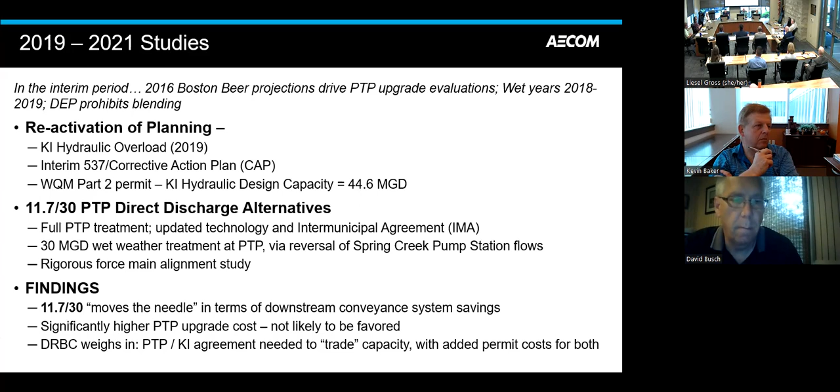So looking more at the interim period, 2019 to 2021, which is the more recent efforts involved, what had transpired was around 2016, Boston Beer started making projections of their future needs and what was being seen at the pretreatment plant. And that was going to drive a lot of upgrade. They have a very high strength wastewater, as I think everyone's familiar with, and it really dictated the capacity needs of the plant. There was also, overriding that period, wet years, the 2018, 2019 period, that was really driving a lot of wet weather challenges. And at the time, DEP also came out with their statement prohibiting any kind of blending at Klein's Island in terms of bypassing flow around a biological process. So those were all important elements during that period.

And so reactivation of planning was done to take another look at things, beyond that 4.9, at what other options and opportunities there were looking forward. So one of the items, just to reference, there was a hydraulic overload at the plant in 2019 where we exceeded the max flow for 3 consecutive months. And as a corrective measure for that, there was an interim Act 537 done and a corrective action plan that was able to restore the ability to move forward with planning modules in the meantime. And as part of that, the water quality management Part 2 permit, which is what the WQM there is, increased the hydraulic capacity of Klein's Island from 40 to 44.6 MGD, which was important. The DEP regulates plant capacity by hydraulics and load, so it's important to look at them separately.

So at the time, a revisit to direct discharge was looked at, and one thought was increasing the flow of that direct discharge. So then we looked at 11.7 MGD, and that included the projections that reached the pretreatment plant plus a reversal of the Spring Creek pump station to bring more flow from the Western Lehigh area to the pretreatment plant to take advantage of the asset there. And also by doing that, we're able to get a lot of that wet weather out of the conveyance system. And that's what that 30 MGD component for wet weather is.

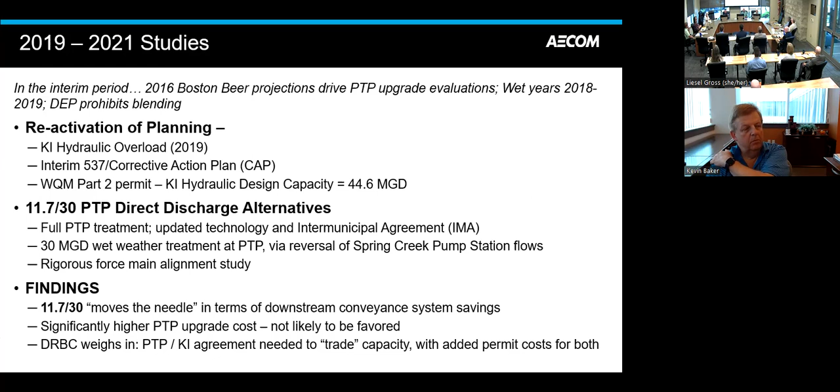There's also some weigh-in from DRBC. In the background, there's a lot of regulatory discussion and getting their input on what will be involved with that. And there would be a trade of load from Klein's Island up to the pretreatment plant. And this would add a lot of potential costs with permitting and impacts down on Klein's Island. So at the time, the 11.7 was an option, but there's more to come. That's what we'll talk about next with the fresh ideas.

But first, just our role overall as program manager. There's a lot of important facets associated with this. The work Kleinfelder is doing down at Klein's Island, Arcadis in the conveyance collection system, Jacobs with the pretreatment plant, ARRO with their role in the interim Act 537 and going forward with the formal 537.

Our involvement: a lot of coordination between all the different consultants, looking at it holistically, providing value engineering, independent review of the different evaluations, regulatory considerations and drivers, looking at it overall holistically, and then ultimately integrating all the findings and reporting and recommendations, which will be a main component of the technical portions of the Act 537.

So just an example, program management with very large utilities is often a standard, for example Blue Plains, DC Water, but it also can be used by other utilities when there's a specific program that needs to be done that's complex with a lot of moving parts. And so a program manager can come in just to support and have a different role, whether it's doing components of the program and just helping make sure that the program all comes together properly to give, at the end, the best path forward on this specific program project.

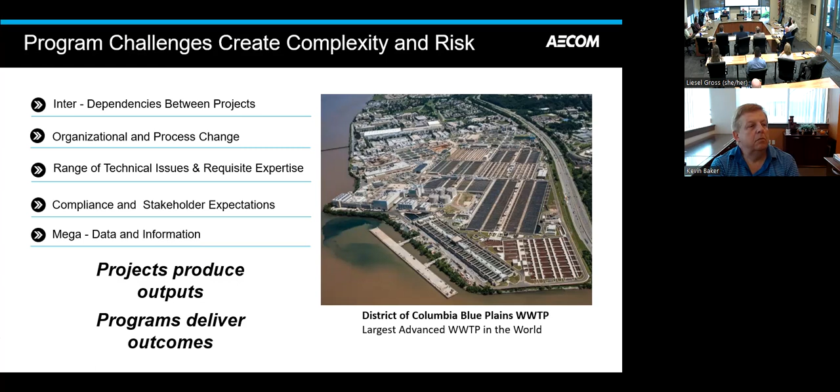So as far as our fresh thinking and what we're looking at right now, moving forward at the pretreatment plant, we recognize there's advantages in all of these assets. If you step back and look at it from a regional perspective, the pretreatment plant offers real robust organic removal, and we see that evidenced in the water reaching Klein's Island and the capacity that's available there from an organic perspective. There's ample capacity that still exists, and that's because pretreatment is doing such a good job at pre-treating the higher strength wastewater that reaches it.

Nitrification: in order to meet a new outfall in a direct discharge scenario, there will be nitrification requirements for the pretreatment plant, and that's a significant cost to add at the pretreatment plant. So it really is doubling the cost to go to the nitrification step versus just maintaining it as a pretreatment with organic and solids removal.

At Klein's Island, however, there's robust nitrification already there. It's very efficient too in a trickling filter type format from an energy perspective, and it's doing a really good job down there. So a very good asset at Klein's Island. And as mentioned, there's ample organic capacity there, as a benefit from what the pretreatment plant has been doing historically.

As far as considerations on the conveyance system upgrades, when we were looking at this in the earlier tweaks, reducing the size of the new facilities may save a marginal amount, but if we're able to eliminate major conveyance, those are very significant dollars. So we wanted to make sure that we incorporate that into the different scenarios we're looking at to make sure we can take advantage of that.

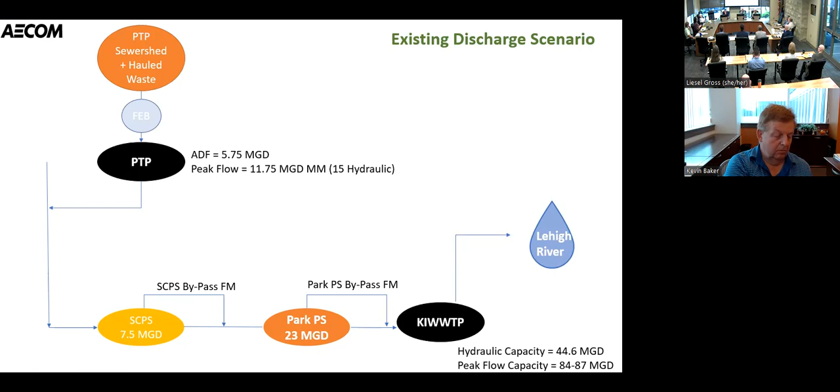I do want to make one more comment, Chris. It's important to remember that the planning horizon is through 2050. But this particular 537, the implementation schedule is through 2035. So the plan is going to have a construction schedule through 2035.

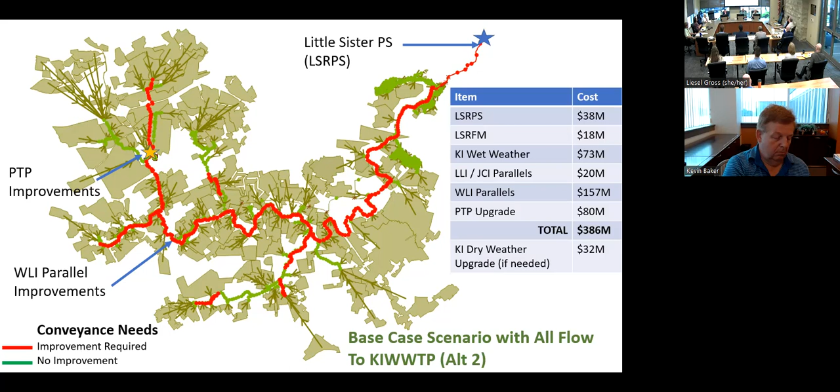I don't want to get too far into the weeds, but just curious. So big picture, the high rate treatment would be part-time. It could be off for June, July, and we get a hurricane in August, and you're operating it a week or two at a time. It would be very infrequent.

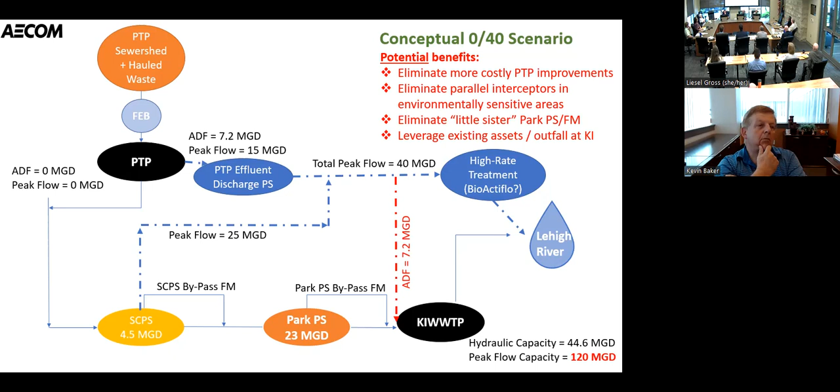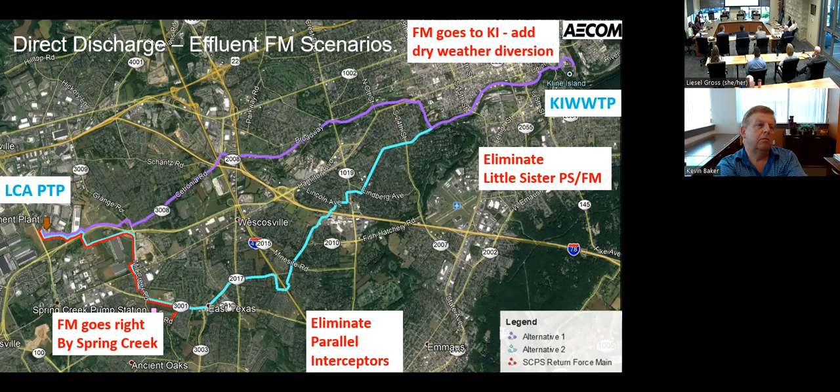So that's coming up. So as far as some of the current areas that we're looking at, working with Arcadis on the conveyance system, as mentioned, the model calibrations and simulations are about to start here. So that's going to be an excellent tool looking forward.

Common Sense I&I program, we talked about, there's these peaks that we see in the historic hydrographs, or what the flow looks like over the course of time, where we could try to eliminate some of those really high short duration peaks with effective inflow reduction into manholes and lids. And that should be just a common theme throughout the approach, just to get that really extensive peak flow out of the system, and then how to manage peak flow at Kline's Island when it arrives there.

At the pretreatment plant, as mentioned, the master plan's underway, working with that, looking at the alternatives. We've also been in technical conversations with Jacobs regarding that. Also having discussions with Boston Beer. I think just today we got some projections on their forecasted loads, which are really critical to seeing how that'll impact the pretreatment plant. But then also thinking beyond that, what else can be done at the pretreatment plant.

One concept is renewable natural gas. We have this high organic strength load coming into the plant. You could do an anaerobic process, create methane, and potentially have a recovery of that energy and costs by generating natural gas that could actually be put into the distribution system. Very good option. There's others such as equalizing flows there to just try to balance operations. So there's a lot of things on the table.

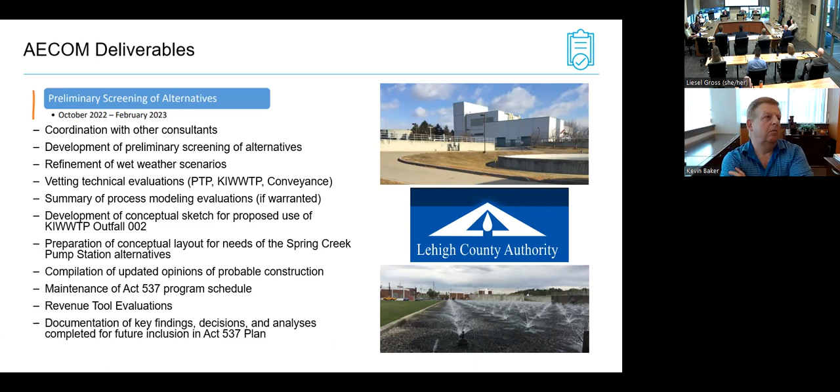Maintenance of Act 537 program schedule. We've developed an overall program schedule just with all the different facets that are involved. The revenue tool evaluations mentioned, and then ultimately documenting all these key findings and tech memos that'll be used in support of the overall Act 537 plan submission in March of 2025.

Thank you, Chris. And if there's any other questions for Chris, now's the time. They're going to step out after this. Quick question for you. Sure. Which one of those milestones that you were talking about to deliver really keep you up at night? That might be the cause for delay of the project.

Yeah, I mean, there's a lot of different factors associated with it. Kind of towards the end, when you have to get all the buy-in and sign off, can be a lengthy administrative process that can be challenging. But we're in good hands with Lisa and LCA, pulling that all together. So that would be a critical component. We'll start with ample time to make sure that we meet that deadline. I think now with the model, the ability to zone in on more of the technical solution can be accelerated.

We had that 160 up there. That's a nominal number because it was the number we used in 2016, and we've all been on the edge of our chair for the modeling to kick in, and Arcadis is on track. They are the critical path schedule, okay? And they're on track to give us the key input that we need, which is what is the peak flow to Kline's Island? Because a lot will flow from that. There's a very good example.

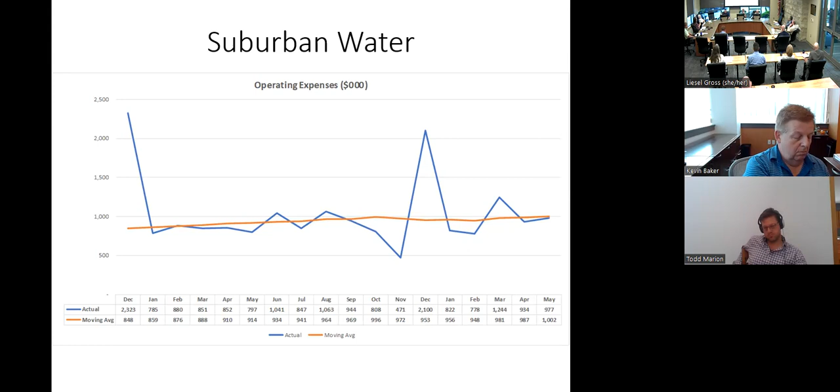In terms of operating expenses, $1 million. When I say moving average, that's a 12-month moving average, by the way. So it's kind of obviously the same picture on operating expenses. December, we were affected by some of the lease restatements. Starting out the year, we're at 953, and it's kind of trended in that area to $1 million right now. And that's even with slightly higher water purchase costs.

And where we are in CAPEX, for the forecast for the year, we think we're going to finish 84. Last year we finished 112, so we went ahead of budget. And in 2020, we're at 63. Where we are at the end of May is, well, we've got 20% of the total budget for the year covered. This year, we were at 22 last year, and in May of 2020 at 17%. So we've done better than that.

Wastewater income for the month, $420,000 or $25,000 better than the forecast. For year to date, 336,000. Well, you would think I could read that sideways, but $59,000 better. Most of that coming from operating revenues, where we were up by 164 on the bottom graph. That got somewhat eroded by slightly higher operating expenses, non-operating items, and interest expense.

So it's a good thing that we had the additional operating revenue to help us out for the year to date. For the full year, we think we'll be at 1.5 versus 1.8, so we're going to be down by $317,000.

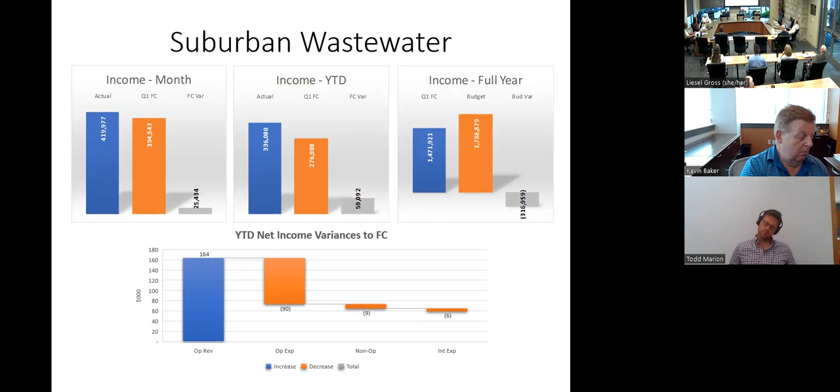Cash flows, $918,000 for the month versus 953, so we're down a bit, 46,000. On cash flows year to date, we're minus 550 versus minus 504. So we're down a little bit by 45,000 on the cash flow year to date. Variances from operations, we're on the positive side, 26.

We've got some good news from lower CAPEX, so that was an $87,000 favorable variance, and then debt service and financing was 8, and then some investing and other took away some of that money, mostly because I'm taking a lot more cash out of this fund and trying to get some interest rate on it, and so I'm basically forecasting that I'm not and then doing it.

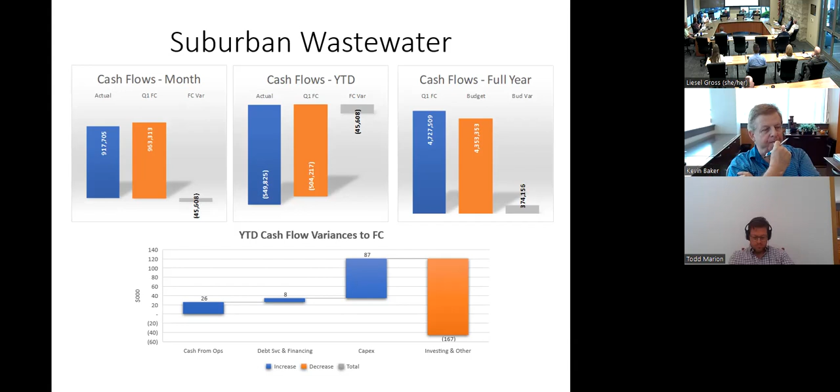In terms of metrics, 9.83 debt service coverage ratio. We're better than 1.2, slightly down to budget, and we think we will finish the year just a little bit lower than budget at 10.73. So we're kind of hovering there.

Operating ratio, 1.07. A little bit lower. We're better than our target of 1, and we think we'll finish at 1.08, which would put us just slightly below budget. Days cash on hand, again, 160.5 consciously done, versus 180, and 305 is where we think we'll finish the year at when I stop investing.

And actually, even in this, there's a lot of opportunities coming about with interest rates that are a little bit better than the 2s and 1.5 that we've been seeing. So I'd be a liar if I didn't say I might look at some more opportunities, because we have some nice invested balances. So operating revenues to forecast were above 102%. Operating expenses were a little bit higher, 101. And the CAPEX is down. They're at 93% versus 100.

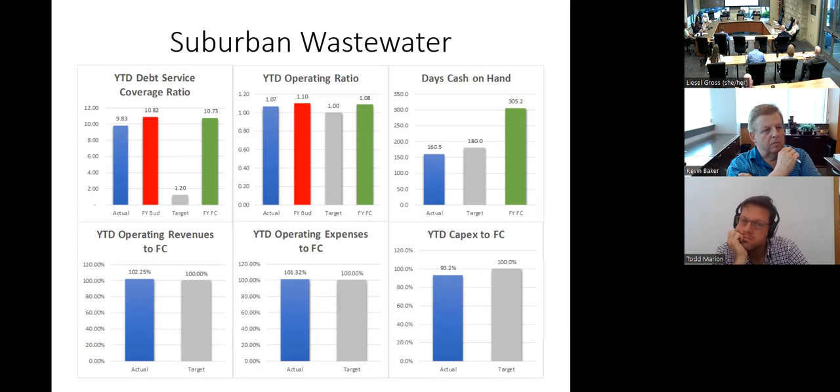Dollars, operating revenues, 7.5 versus 7.3. We think we'll be pretty much right on line with budget, 21.1 versus 21.160. Operating expenses, almost 7 versus the 6.9, so we're up a little bit. We think we'll be up just a little bit to budget on operating expense side for the year.

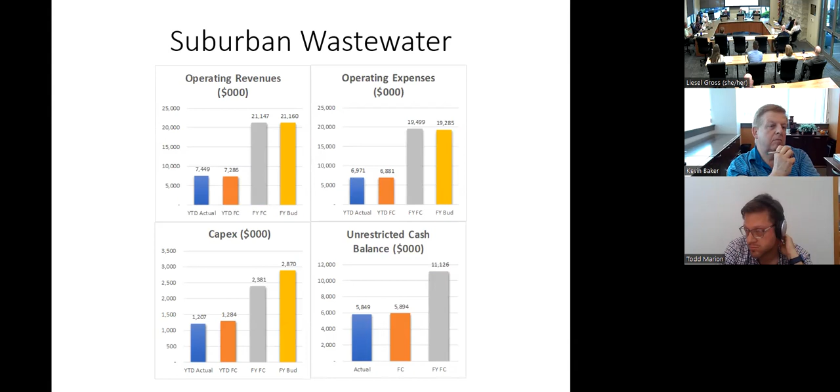CAPEX score 1,207 versus 1,284. We think we'll finish at 2,381 versus a budget of 2,870. So that'll be favorable to budget. And unrestricted cash, 5,849 versus 5,894. So it's right around it. And we think we'll finish at 11.1 for the year.

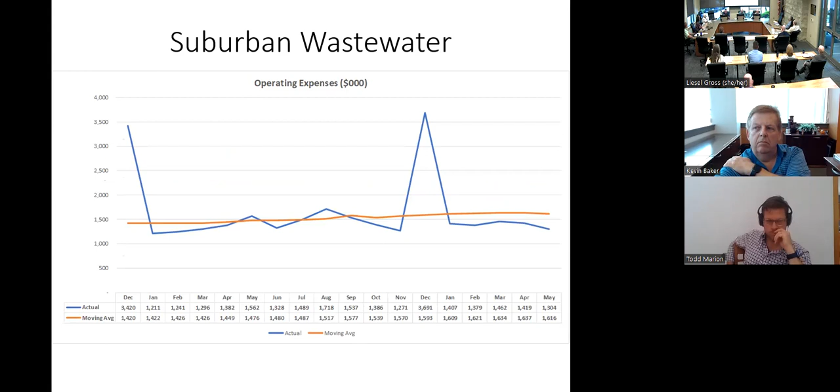So operating expenses through May were 1.6. We started the year at almost 1.6. So that's really not any major shifts in what's going on in that 12-month moving average, which is good.

And CAPEX year to date, we think, well, for the year, we think we'll be at 83% of budget versus where we were at 108 a year ago, and year before that 97. Where we were at May is right now we're at 42%, which is higher than where we were last year at 40 and certainly higher than 2020 at 32%.

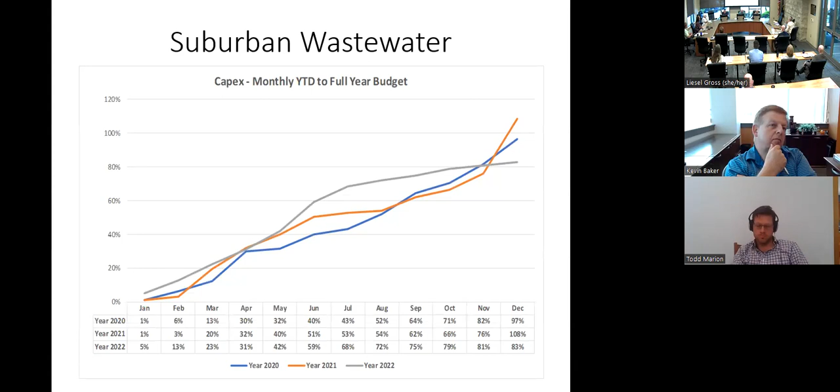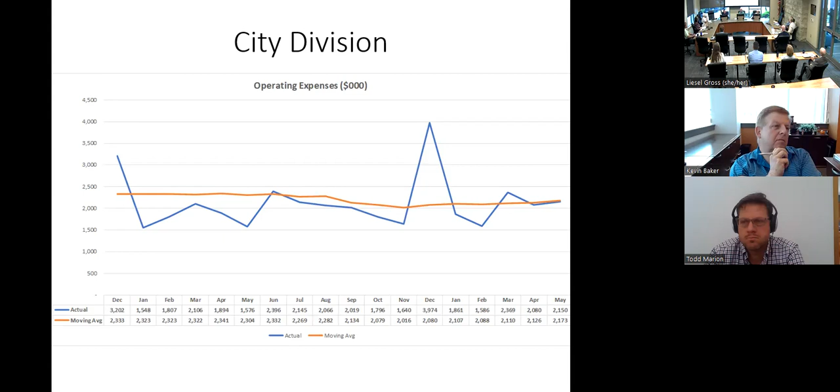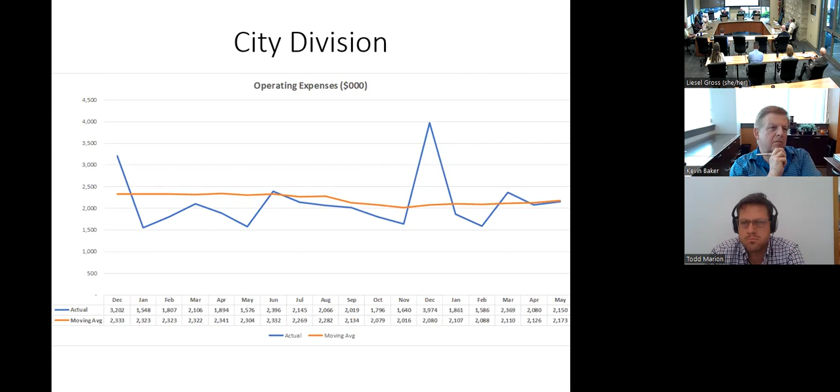If you remember the cap plan that we not so long ago approved, we talked about maintaining some type of rate stability, revenue stability, on the suburban water side. And to do that, we were going to need to borrow $12,180,000 worth of project money over a 3-year period. And that's coming right from the capital plan.